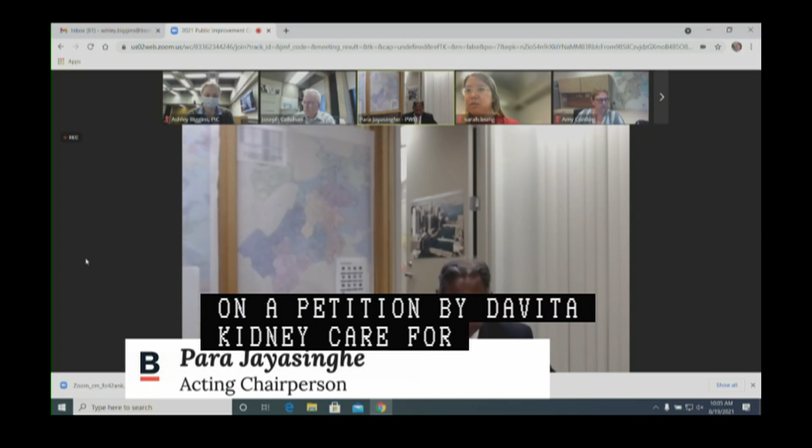First item of the hearing agenda, public hearing number 1, on a petition by DaVita Kidney Care for the making of specific repairs within Harrison Avenue, a public way, Boston proper, located on its southeasterly side at address number 660, generally northeast of East Canton Street, consisting of curb and sidewalk reconstruction, as well as new and relocated pedestrian ramps, specialty pavements, and bike racks. This was brought on as new business on August 5th of this year, 2021, as shown on a plan entitled City of Boston Public Works Department Engineering Division Specific Repair Plan, 660 Harrison Avenue, Boston proper, one sheet dated July 2020. Good morning. Good morning, thank you.

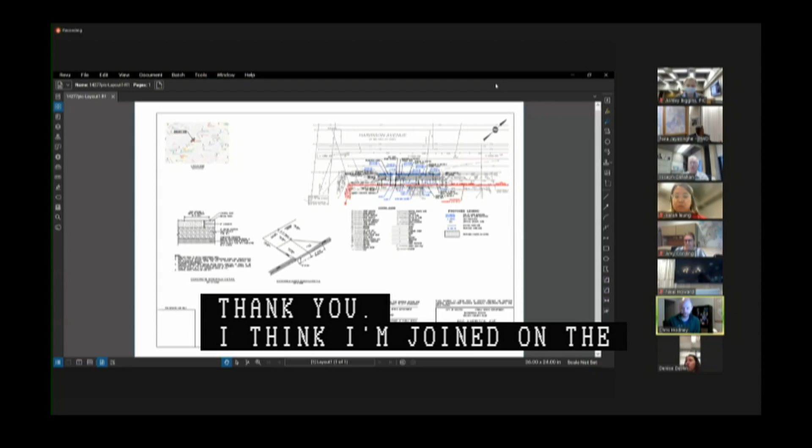My name is Chris Sade with Nitsch Engineering. I'm joined on the call by Paul Terrell, Tech and Architects, as well as Michael Meyer from DaVita. We were before PIC at the new business hearing a couple of weeks ago. The site location is on Harrison Avenue between East Canton and East Dedham Street. This was previously in front of PIC a couple of years ago in 2018 for other work that was done as part of the Smith project, and this is just a minor modification to that work.

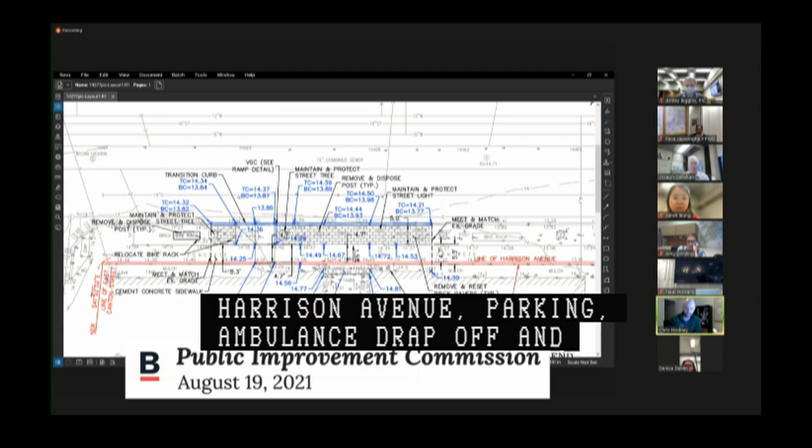The proposed plan includes the changing of 3 spaces along Harrison Avenue from their existing metered parking to ambulance drop-off, and then some modifications to the sidewalk to bring the new door at the building to level with the sidewalk so that there can be accessible access inside the building. So we've got the new ramp here, new sidewalk here, and then some grading. All the materials will be put back in kind, so that includes the cement concrete sidewalk and the permeable strip. And then there is an existing pedestrian easement that was approved back in 2018 on the sidewalk as well, which gets the width to the minimum 5 foot required.

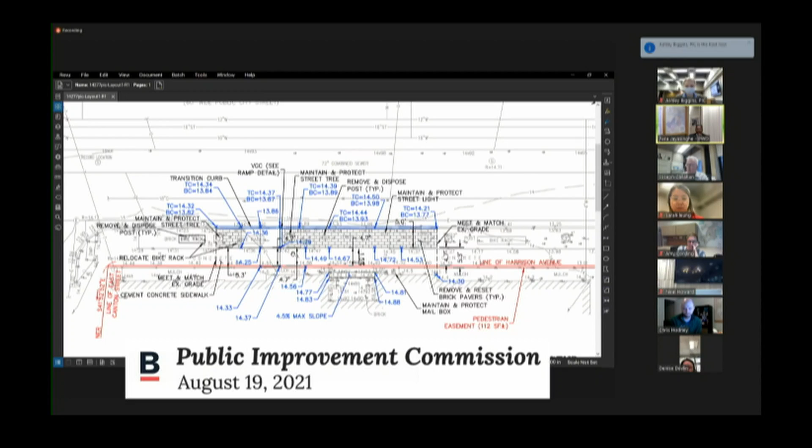And then the one question that had come up at the previous hearing was just coordination with BTD, and I forwarded to Todd this morning. I know Ms. Cording wasn't on the call a couple weeks ago, but just the correspondence between Brian Zamoka at our office and the BTD. Thank you, Chris. At this point, I'll open up for any questions by fellow commission members.

Hearing none. Any comments by PIC staff and or members of today's audience? No, none. Thank you, Todd. At this point, I'd like to hear a motion regarding public hearing number 1. I'll make a motion to approve a petition by DaVita Kidney Care for the making of specific repairs within Harrison Avenue as read into the record by the chair. Second. All in favor, please signify by saying aye. Aye. Anyone opposed or abstain?

Good morning. Good morning, can you hear me? Yes, we can, Richard. I'm having a little camera difficulty, so I think I've only got audio this morning. Hope that's okay. That's fine. Go on. Yeah, so let me just get my screen shared here.

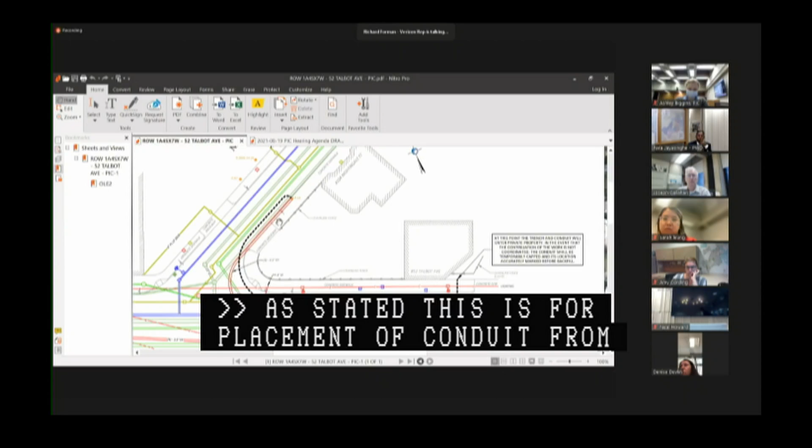Thank you, Richard. As stated, this is for placement of one 4-inch Schedule 40 PVC conduit from existing pole 14 on Nightingale Street to the property line at 52 Talbot Ave. It was requested by Boston Water and Sewer to have this conduit placed closer to the curb line on the corner of Nightingale and Talbot so that it would avoid crossing the sewer line twice. We have moved the conduit closer to the curb line, which has slightly changed its footage.

I've also communicated with Verizon regarding the city shadow duct. This is going to include a city shadow conduit following the Verizon path. It's going to rise and be capped at pole 14, follow the same trench to the property line, and be capped below grade at the property line. The city's 4-inch and a quarter shadow duct is going to follow the Verizon conduit.

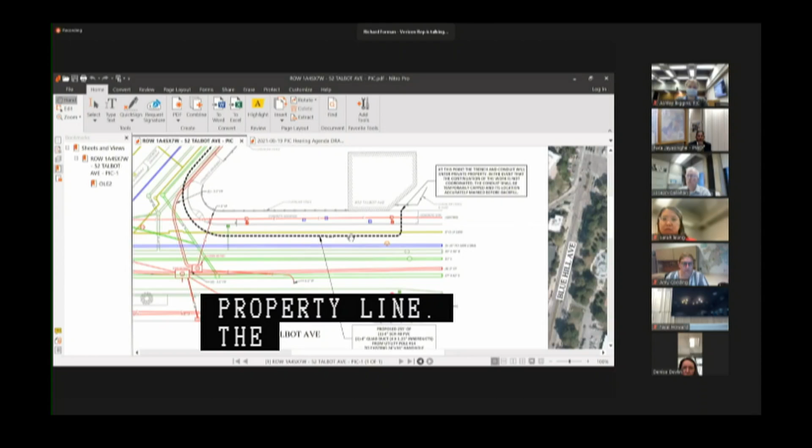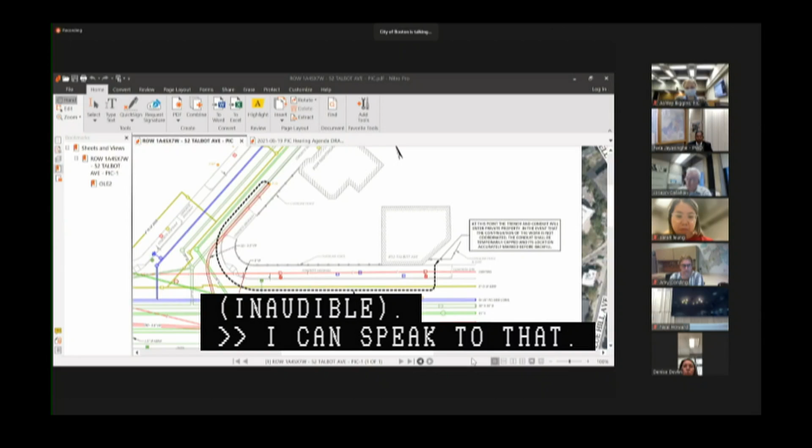Richard, was there anything else requested by either PIC staff and or commission members? My notes indicate there was a question about an extra handhold that may have been requested by my chief engineer of the Public Improvement Commission. Yeah, I can speak to that. I communicated with Verizon that we were requesting a city handhold in the sidewalk in the vicinity of 52 Talbot Ave so that we could access the city shadow conduit.

Verizon has come back and proposed that they bring the city shadow conduit up the pole and cap it above the sidewalk, at the other end, so that we could access the city shadow there. I would leave it to the commission to decide whether that's appropriate or not. I would be okay with that, personally.

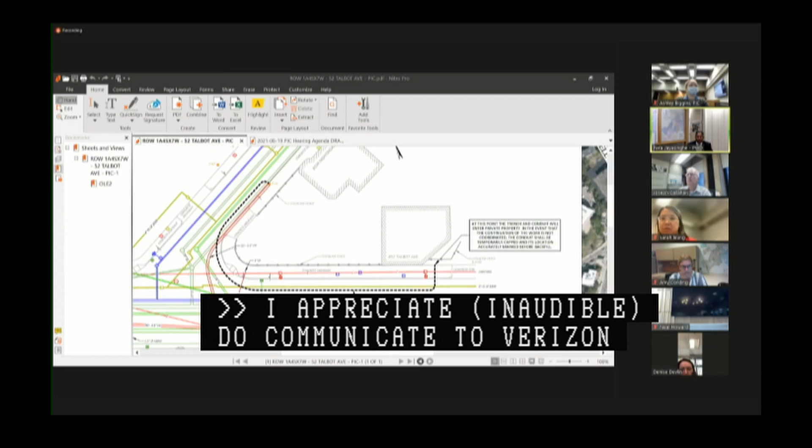Todd, I appreciate you trying to go the extra length to ensure the city has access. I'm not sure whether I'm comfortable with this means. We will continue this conversation independent of this petition, but do communicate to Verizon, and I'm communicating with all petitioners, including Verizon, that it is strongly desired that you all give very serious consideration to any requests or comments put forth or guidance given by Mr. Liming, who is the Chief Engineer for the Public Improvement Commission. So, any comments by fellow commission members?

Hearing none, any further comments by PIC staff and or members of today's audience? No, none.

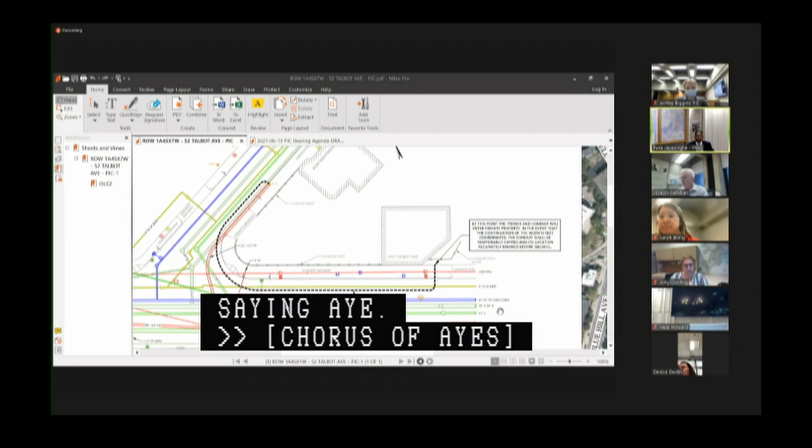Hearing no further comments, I'd like to hear a motion regarding public hearing number 2. I'll make a motion to approve a petition by Verizon New England for a grant of location in Talbot Ave and Nightingale Street as read into the record by the chair. Second. All in favor, please signify by saying aye. Aye. Anyone opposed or abstain? Motion passes. Thank you. That concludes the public hearing segment of today's agenda.

Now moving on to the new business portion of it. New business item number 1: Highgate Street, Cambridge Street, Harvard Avenue in Brighton, pedestrian easement, specific repairs, and earth retention license on a set of petitions by Allston Square Realty.

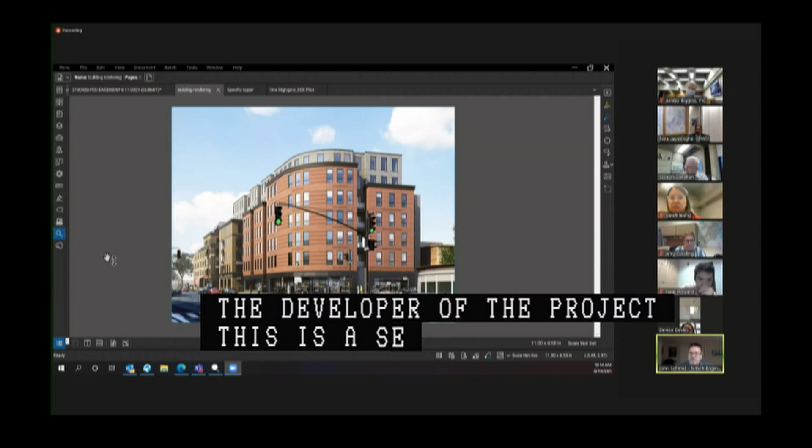Good morning, this is John Schmidt with Nitsch Engineering. Can you see my screen? Yes, John, go for it. With me is Jacob Simmons, who's online as well with City Realty Boston, the developer of this project. What we're proposing today is a 7-story mixed-use building with first-floor retail, consisting of 82 units of housing and a 59-space below-grade garage.

The first item is the temporary supportive excavation. We are proposing a soldier pile and lagging system around the perimeter of the site, which will be cut 6 feet below the sidewalk once it's constructed. Along Harvard Avenue, we project about 2.5 feet into the public way. On Cambridge Street, we project 2.5 feet into the public way. And on Highgate Street, we project into the public way about a foot at the end of the building here. I apologize, this project is located in Brighton at the intersection of Cambridge Street, Harvard Ave, and Highgate Street.

If you like, I can accept questions. Any questions regarding this proposal?

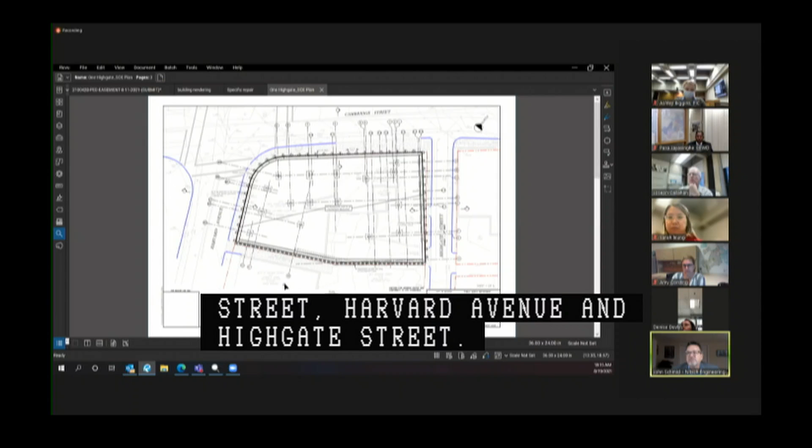Sorry, John. Normally Brian Ronan from Inspection Services Department gives us guidance on matters of this nature. Today, due to scheduling issues, Mr. Ronan is unable to be here.

I don't quite recall what his schedule is like for the public hearing date, but what would be truly helpful is if for some reason Brian is unable to be at the commission hearing two weeks from now, to have a statement from Mr. Ronan to both you and PIC staff attesting to the fact that he is absolutely okay with the earth retention system.

Yeah, we did do the full notification process of 22 city agencies and utilities, and within the engineer's report, we have an email from Brian saying he has no objections. But what I can do is forward him this drawing and over the next two weeks just confirm he no longer has any objections.

Thank you, John. Appreciate that additional due diligence. Thank you.

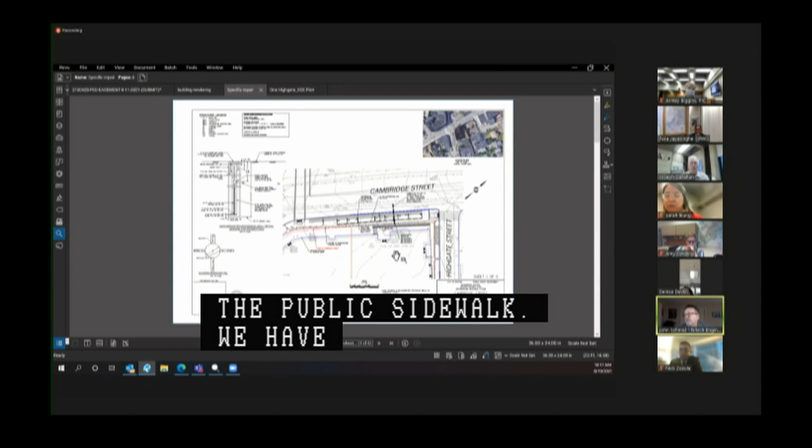Moving on to specific repairs, along Cambridge Street, we are proposing a series of recharge wells in the public sidewalk. We have 8 wells and a tank within the building that will capture the 1 1/4 inch stormwater runoff. We have a system that will pump into the 8 wells within the sidewalk, and then it will overflow into the city system.

The drawings have been presented to Boston Water and Sewer, and we've received 2 rounds of comments, and we are resubmitting the site plan for approval in the coming week. So they are familiar with this application.

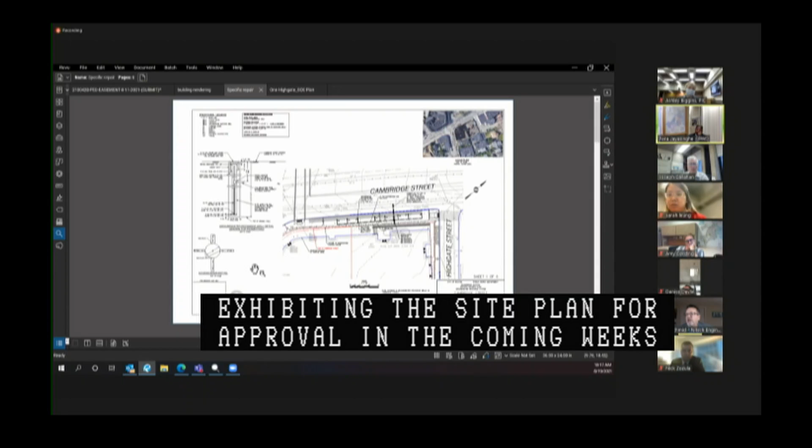John, your thoughts on the maintenance agreement? So the LMI is in the process of being prepared and reviewed with Chung. I will ensure that at the public hearing, I will give you an account of the status of that. But my client is committed to providing the maintenance that's required for the system.

John, as I and other commission members have echoed in the past, our preference, to the point of insistence, is that the maintenance agreements be executed at the time of the public hearing, not just additional conversation. So if you could encourage all parties to have an executed agreement, because it becomes increasingly difficult for us to record these plans in the absence of a signed executed document, where the execution date of the signed LMI doesn't match up with our recording dates. Understood. I will push everyone to ensure that this happens.

Thank you. Thank you. Continuing. We have a series of specific repair plans around the perimeter of the site.

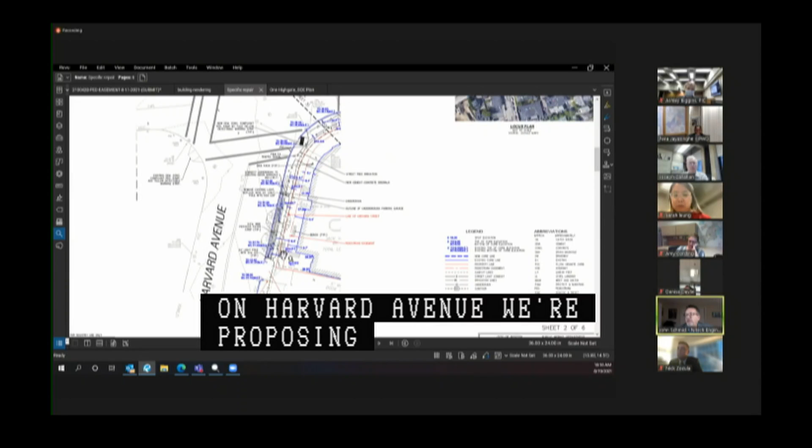On Harvard Ave, we are proposing a 3.5-foot pervious paver along the curb line and providing an 8-foot wide accessible concrete sidewalk. In doing so, we are proposing a pedestrian easement as well. We have new street lighting that has been reviewed and approved by the Boston Street Lighting Department.

We are proposing 2 new street trees along this as well, and we also have some bike racks within the paver zone. One thing I'd like to note, and I realized during the previous hearing, is that we do not propose any shadow conduit, so we will ensure that shadow conduit is indicated on the final public hearing drawing.

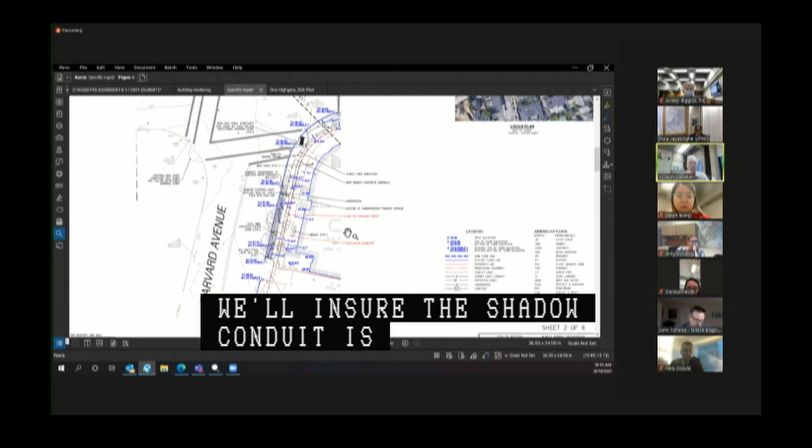Moving along to Cambridge Street. Along Cambridge Street, we have 3.5 feet of pervious pavement, 8-foot minimum concrete sidewalk, 7 new street trees, as well as some seating areas in the pervious paver zone, 7 seating elements, and a series of bike racks within the pervious paver zone.

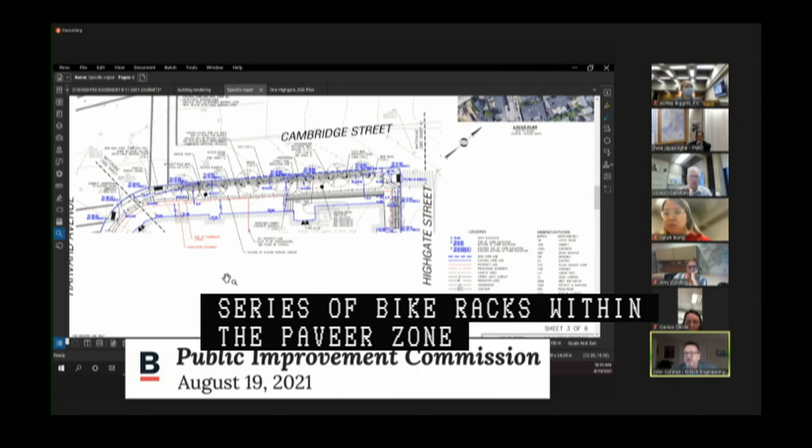What else can I say here? I was informed this week that the city has a capital improvement project within Cambridge Street. I've been told that it will not impact the curb line, but we may be asked to provide a bus stop along Cambridge Street.

So I have reached out to BTD, and I'm trying to schedule a meeting with them early next week to understand exactly what is proposed here, so we can address it in the next couple of weeks prior to the public hearing.

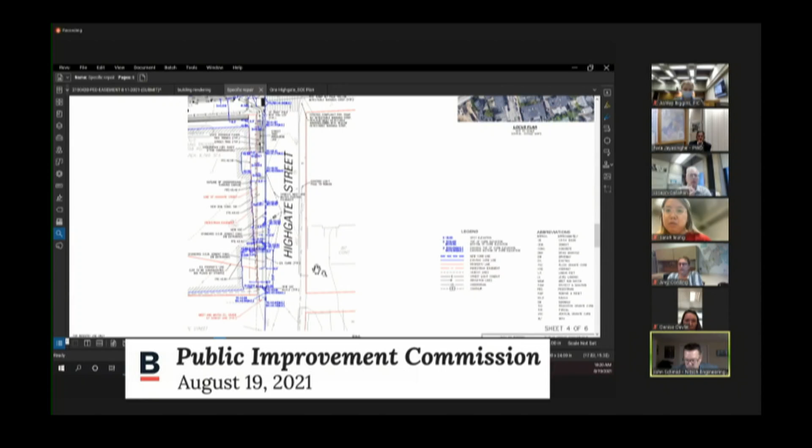Moving along to Highgate Street. Near the intersection, we provide a 5-foot wide pervious paver with 2 street trees, and then throughout the entire sidewalk, we provide a 5-foot wide concrete sidewalk. We have a loading zone here.

We have a garage entrance here, which is 23.6 feet wide, and then we have a loading zone, a loading dock, which is 12 feet wide along this. But we do provide a little refuge area between the 2 openings and the 2 access points to the building.

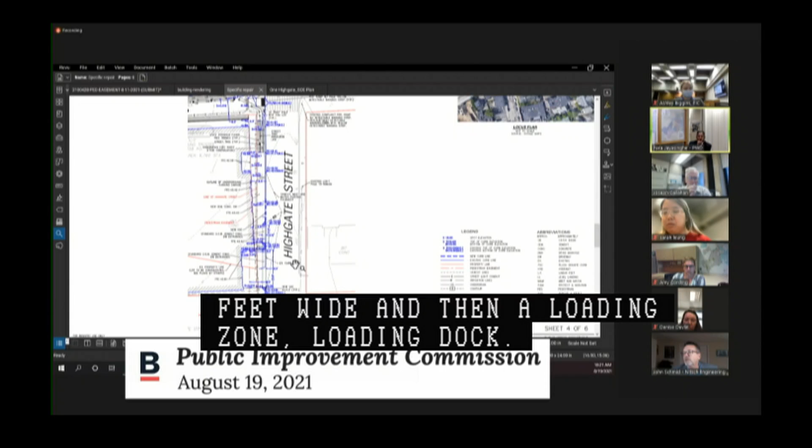John, I'm sure you meant Highgate Street, not Highland Street. I apologize, Highgate Street. Thank you.

Any questions regarding the specific repairs? And then our final application is the pedestrian easement.

All right, my computer froze. The pedestrian easement, here we go.

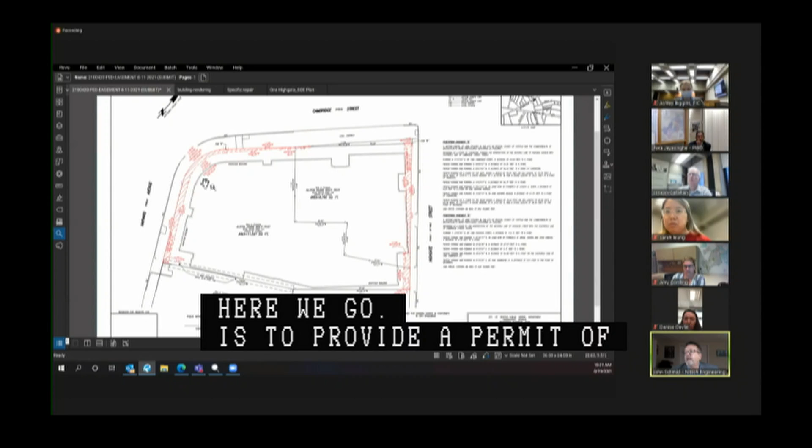The pedestrian easement plan is provided around the perimeter of the site to ensure that along Harvard Ave and Cambridge Street, an 8-foot wide concrete pedestrian access is provided. Along Highgate Street, we have a 5-foot wide pedestrian access on a concrete sidewalk.

So that is the gist of our application. Any questions?

John, do you have a sense of when the project proponent might be anticipating to start construction?

Yes, my client is anxious to start construction early this fall. This project was cooking along nicely until COVID hit last spring. Then it was delayed for 6 to 8 months, and then we picked it up late spring. We're wrapping up construction documents as we speak. We hope to have BWSC permitting approval within the next few weeks. So I believe they hope to begin construction sometime in September or October.

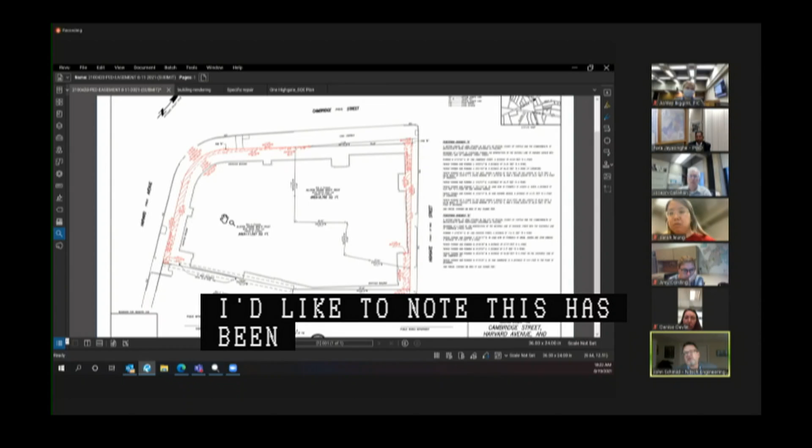I'd also like to note that the TAPA has been reviewed, and the final version is with Bill Conroy, and the CMP has also been reviewed, and the final revised version is with BTD. So those two items are also in the process of being completed.

My question regarding the construction of this project is in relation to the city's capital improvement project. If you could let your client know that the city will be having a noteworthy cycle track bicycle lane project and safety improvement project going through this corridor, so there will be needed some coordination with the city's roadway project and this project.

Thank you. John, I think Zach Wasserman will be the best in public works to give you guidance on the rough timelines, as much as you are seeking considerations or guidance from the transportation department regarding the location of the bus stop. Okay, I'll reach out to Zach.

Thank you. At this point, I'll open up for any questions by fellow commission members.

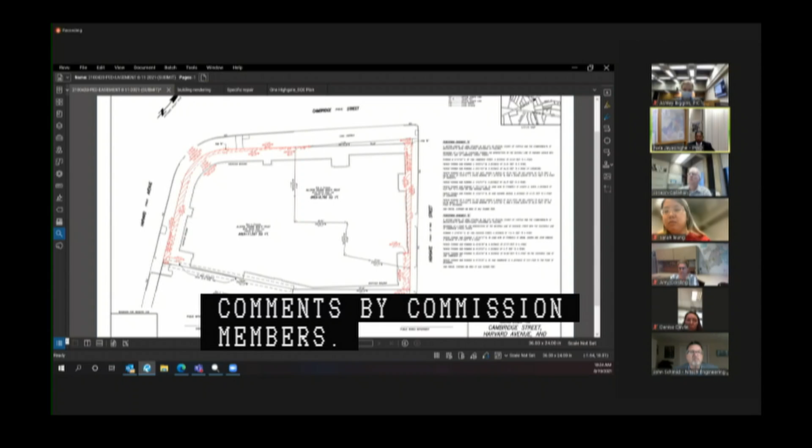Sarah, I'm going to assume that you are okay with the width of the pedestrian easements that are being proposed in conjunction with the streetscape improvements they are doing, where there's adequate width on both Harvard Ave, Cambridge, and Highgate to accommodate your needs, meaning the needs of the commission.

Yes, the team has adequately addressed our comments from earlier this year, as well as addressing the comments regarding the reciprocal ramps at Highgate and I believe Cambridge and Harvard.

I'm not sure if we received those plans by email, but John, if it's possible to just send updated plans to us, that would be great. I will do that. But otherwise, these reflect our comments that we made.

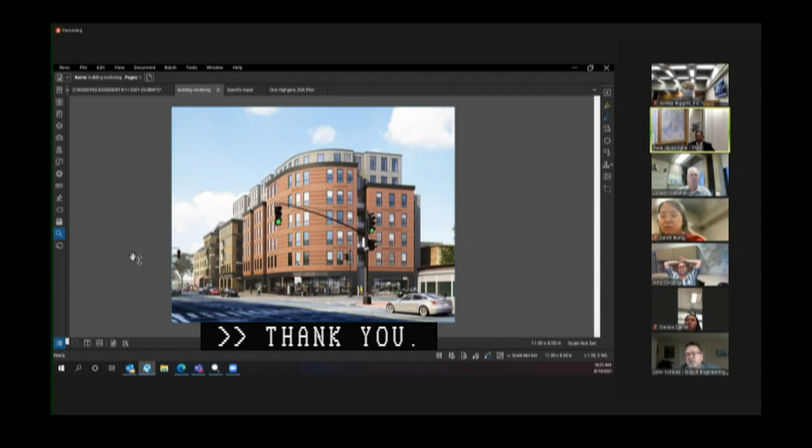Thank you, Sarah. Amy, I suppose John Schmidt will have to coordinate with Matt Moran for the bus stop over there. I'm not sure whether the inclusion of the bus stop might require adjustment of his specific repair plans. Yeah, he's already reached out to Matt. We should be able to pull this off by the public hearing.

Thanks, Amy. Any other comments by fellow commission members? Hearing none. Mr. Liming, any comments by PIC staff and or members of today's audience?

Just would like to point out, and John can confirm, that what was shown is an old version of the plans. There's a grease trap proposed for Cambridge Street that's going to be removed, correct John? Yes, that's right Todd. I was actually going to address that in my presentation, but I was hoping no one picked up on that. But yes, that will be removed in the final submission. Thank you. Honest mistake. Oh, good eyes.

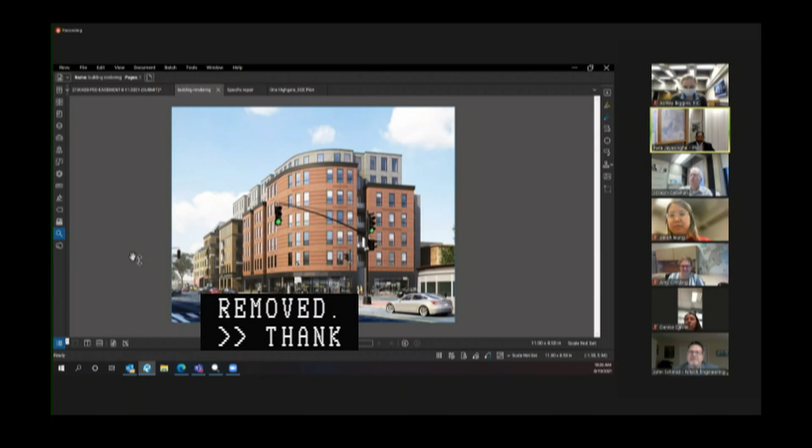And you too. Second item on today's agenda, 282 through 300 Bremen Street, Brooks Street, East Boston, pedestrian easement, specific repairs on a set of petitions by 282 Bremen Owner LLC. Good morning.

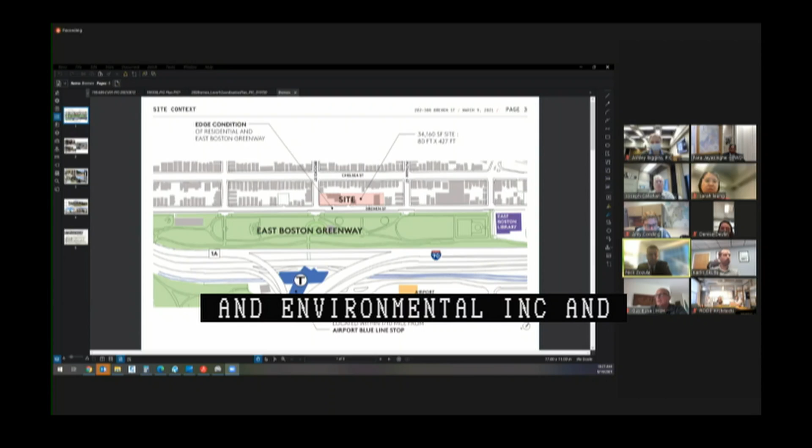Good morning, Mr. Chair, members of the Commission, Attorney Nick Zazula, McDermott, Quilty, and Miller. Introducing the team, we have the petitioner with me this morning, 282 Bremen Owner LLC, Neil Howard and Brian Lee. Civil engineer is Carlos Sculti, who's sharing his screen now, from Civil and Environmental Consultants, Inc. We have folks from Rhodey Architects on as well, who's the architect on the project, and I believe I saw Guy Busa from Howard Stein Hudson as well, who is on the project.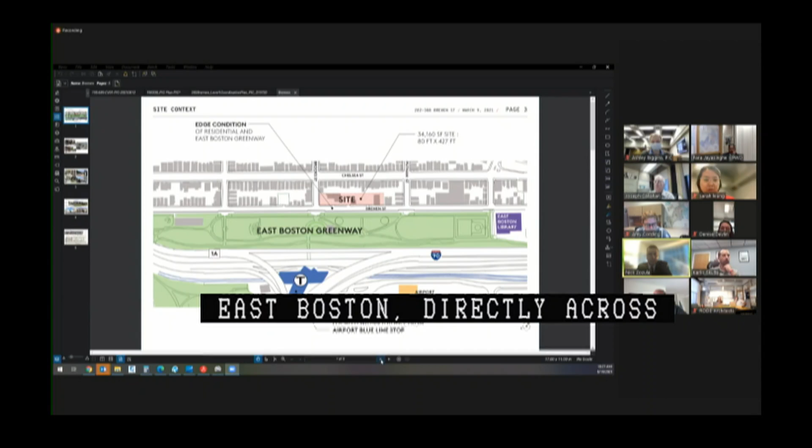Mr. Chair, just because this is the first time you've seen this project, I just want to give a brief overview and background. The site's 282 to 308 Bremen Street, as you can see here on the screen. It is in East Boston in the Maverick Central neighborhood. It is directly across the street from the Bremen Street Community Park and runs to the corner of Bremen Street and Brooks Street. The site itself is a fairly large site.

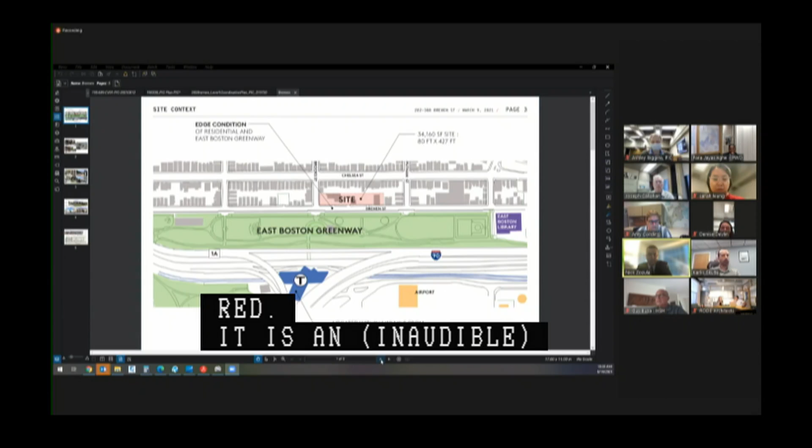It's about 34,160 square feet. It's narrow and elongated in shape, as you can see from the site pictures here in red. It is an edge condition, and what's on the site now is basically automobile repair facilities, garages, and a small nondescript 4-unit residential structure, but really just lots of paved parking, no landscaping, no open space, etc.

So in planning the project, which you'll see before you today, a lot of care was taken to respect this elongated shape, its visibility on the park, and its visibility on the corner, designing a building that responds to that. What is being proposed is a 110,000 gross square foot building.

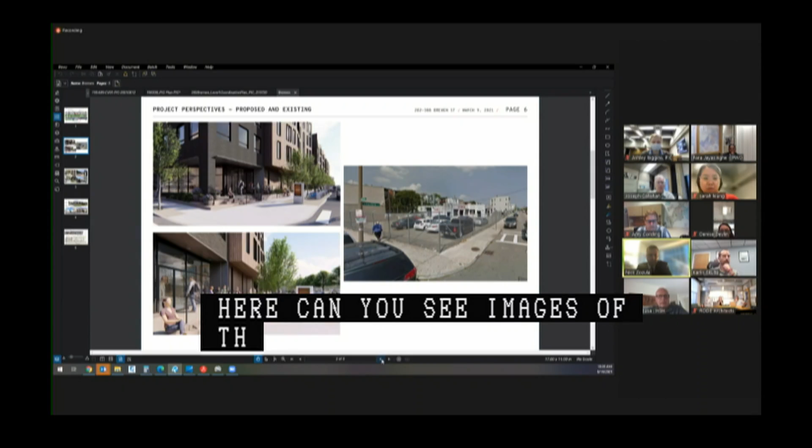Here you can see some images of the streetscape now. Again, you can see the garage on the right, and some street images on the left of what's being proposed. What's being proposed is a new 5-story building with 4-story end caps that step down towards Brooks Street as well as towards the other side of the project.

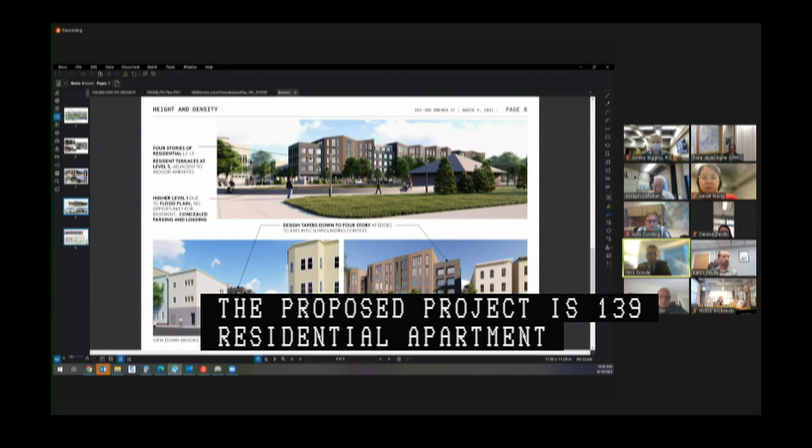The proposed project is 139 residential apartment and/or artist live-work units, which would be on the ground floor to activate the street. About 2,100 square feet of artist workspace on the ground floor, about 3,200 square feet of retail space, lobby, and storage on the ground floor, and garage parking for up to 61 vehicles.

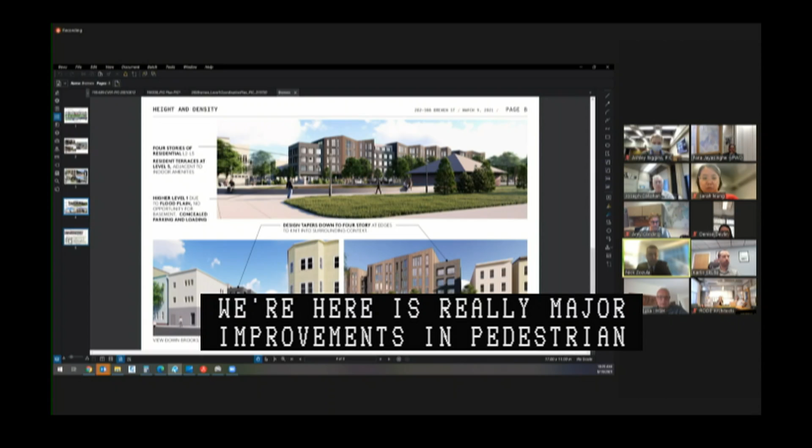And obviously why we're here today is really major improvements in pedestrian access, open space, public realm, and things of that nature. The project has been approved by the BPDA. It's a large project review, so there were a lot of eyes on this from city agency perspectives, the public, et cetera. That was approved back in February 2020.

The zoning board approved this project back in March of 2021, and many of the upgrades, specific repairs, and the ped easement that you'll see in just a moment came about as a result of an extensive Article 80 outreach and administrative city agency review process.

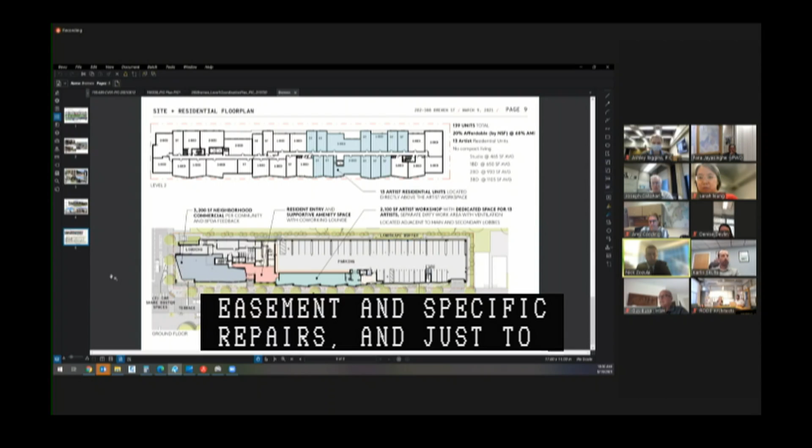We're before you today for a ped easement and specific repairs. And just a note before I toss it over to Carlos to go through what you really want to see today: I heard John Schmidt talk about the TAPA status and the CMP, and both of those for this project are at BTD currently.

The CMP is under review as of today, and the TAPA has actually been reviewed and approved, and we're just waiting on the paperwork to execute it with Bob D'Amico over at BTD. So we're moving along on that front as well.

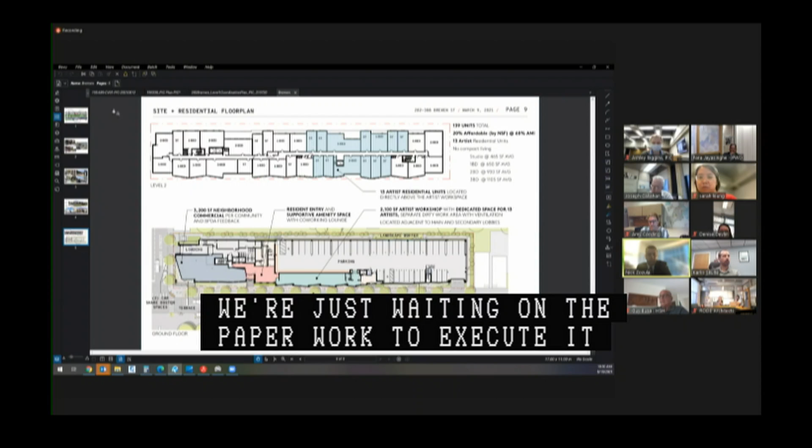Can everybody hear me? Yes, Carlos, you're fine. Great, thank you. For the record, Carlos Scolti with Civil and Environmental Consultants, the civil engineer on this project. As Nick mentioned, we're in front of you today for a specific repair and pedestrian easement application.

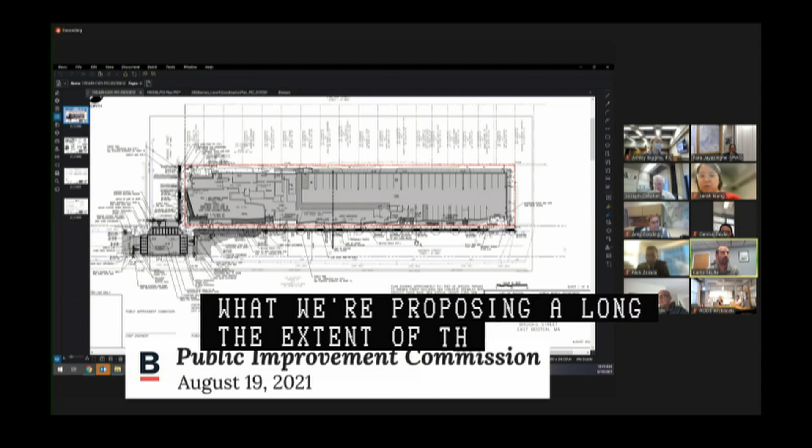A lot of the work that we're doing is really cleaning up the frontage and adding a lot of improvements to the streetscape on both Bremen and Brook Street. So what we are proposing along the full extent of the frontage on Bremen Street is a pervious paver strip, a 3-foot wide strip along the extent of the majority of the building, along with a 5-foot wide concrete sidewalk that will provide the accessibility.

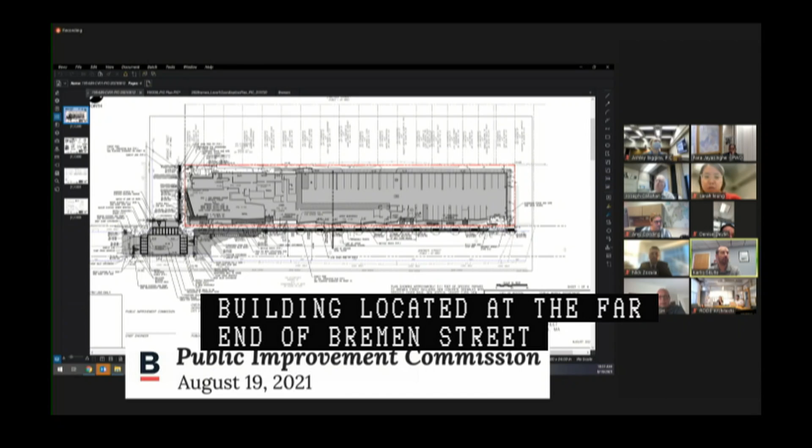So in order to construct that 5-foot wide sidewalk, we do have a pedestrian easement that extends onto the property, allowing for that full 5-foot width for accessibility. There is a single driveway entrance into the ground level garage for the building, located at the far end of Bremen Street, which is 20 feet wide. That is the only driveway access on Bremen Street, which really reduces the amount of curb cuts that are there today, cleaning up that frontage.

And along Brook Street, we have a single loading access into an enclosed loading space within the building. That one's 12 feet wide off of Brook Street.

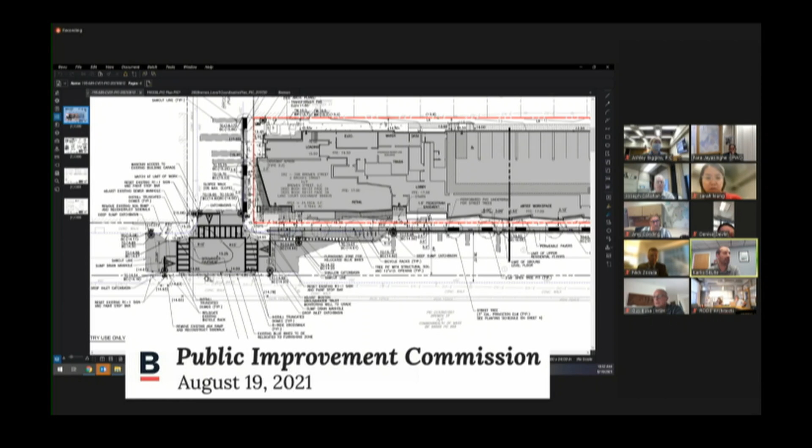Within that pervious paver strip, as we get closer to the intersection of Bremen and Brook, a major change being proposed as part of this project is expanding the pedestrian realm and streetscape frontage with a shifted curb alignment that will allow for relocation of the existing Blue Bikes, currently located on the southerly side of Bremen Street. Those Blue Bikes will be relocated along the furnishing zone here in front of the main retail entrance to the building.

It'll be an expanded pervious paver zone from the back of curb to the 5-foot wide accessible path here. Within that zone, there will also be additional bike storage provided, as well as additional bike racks added along the extent of Bremen Street, cascading down the street. There'll be additional bike racks proposed within that pervious paver zone along Brook Street as well.

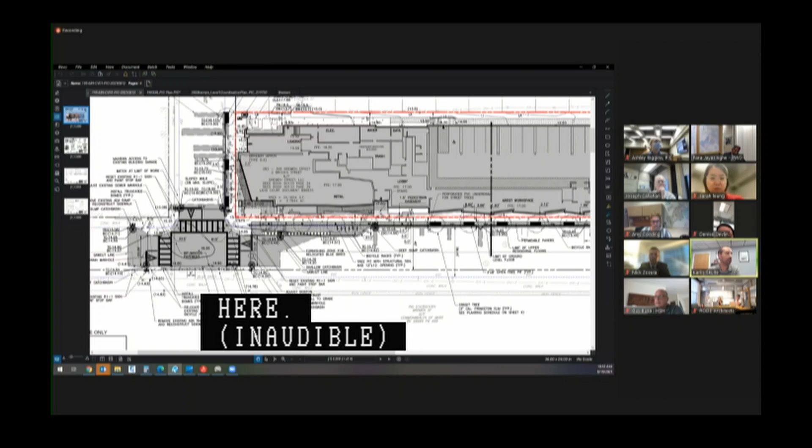There's also going to be a significant improvement in terms of access and pedestrian connectivity to the park on the south side of the road. We are proposing a raised tabletop intersection at this location, and we've been working with BPDA, parks, and disability staff to make sure the alignment and geometry of this intersection works for everybody. We've received preliminary feedback and have a meeting scheduled next Tuesday to review comments, revise the plan, and resubmit with any minor tweaks warranted. This will provide an improved condition at this intersection, which will remain stop controlled in all directions as it currently is today.

We are also in front of Boston Water Sewer Commission. We've received two rounds of comments on our site plan submission, and we'll be resubmitting pending final revisions to the PIC plans. In order to facilitate construction of the raised intersection, we had to add a number of catch basins to pick up stormwater and prevent any localized ponding.

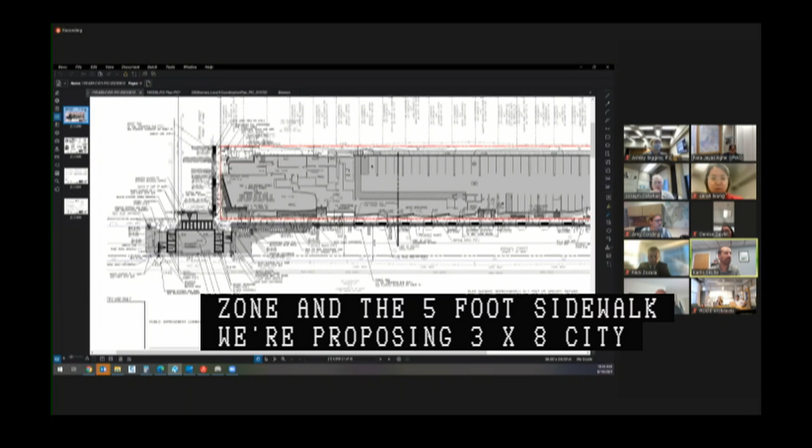With the improvements along the frontage, we are proposing to add 19 new street trees; currently there are none. Within the standard width section, where we have a 3-foot pervious paver zone and a 5-foot concrete sidewalk, we're proposing 3x8 city standard tree pits with mulch. In the area with more anticipated pedestrian activity, we're proposing a 12-inch by 12-inch opening at the base of the tree with a pervious paver placed on top, as well as structural soil and drip irrigation to maintain and provide better tree growth in the future.

That's the majority of the improvements we're proposing as part of this project. We're happy to take any questions or answer anything else the commission would like clarification or additional information on.

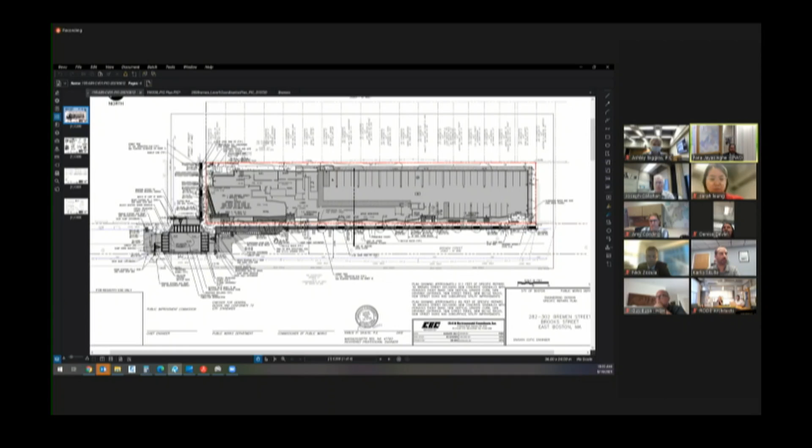Thank you, Carlos. I have a couple of points of clarification, and some questions related to your presentation, and then a question about the opening slides which Nick presented. Let me start with yours, Carlos.

Sure. So the retail space that is there, when you are programming the building, very close to the intersection, I see the word retail. Can you point to the retail space? Okay, right about there. So Nick, the concern which the city may have, or should have, is the type of retail that's going to be there that might end up with cars stopping illegally, surprise, right by the entrance to this intersection. So Nick, there should be some consideration given to the consequences of the type of retail there. Do you have any sense of what type of retail is being proposed that might cause someone to park in front of that area, now that the sidewalk has been pulled out? So I have a bit of a concern, the city may have a concern. Can you respond to that, Nick, first of all?

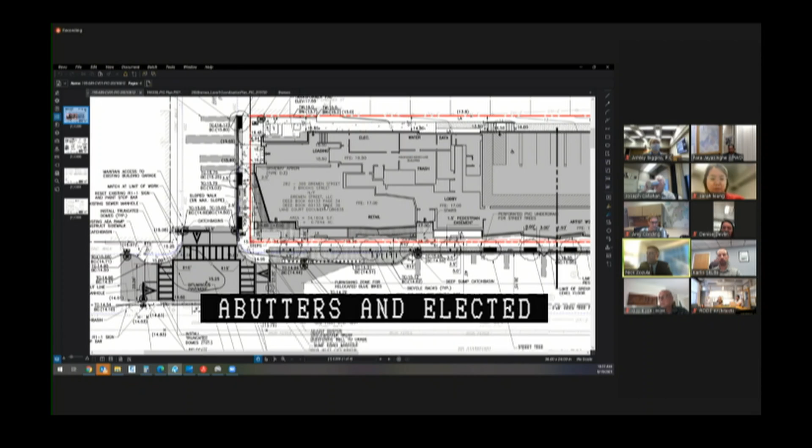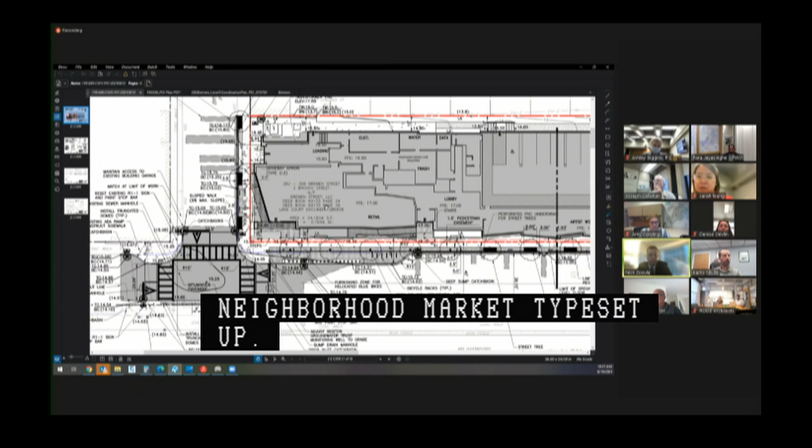Yes, I can. So the idea here is there's no tenant right now, but in discussions with neighborhood groups, abutters, and elected officials, they thought it'd be a good spot for a small cafe or small grocery store — a much needed public amenity. This is a major crossing area coming from the train, from the Blue Line through the park, and folks were loud and clear that they wanted some sort of small grocery store or retail, potentially a cafe where people could grab something walking to and from the train in the morning — a neighborhood type retail. It's not meant to be a huge space, I think a couple thousand square feet, more like a neighborhood market setup. It's a good point, and we can certainly look at that. We do have bump-outs and other things taken into consideration on this corner to help stop that from happening, but in general the programming is not meant to encourage folks to double park at this location.

It's more meant to be a walkable type amenity, not a parking and drive-to type amenity for the neighborhood. Thank you, Nick. My second question.

The city has a system of a deposit when people are redoing our sidewalks, meaning we take a deposit from you in case you don't put the sidewalk back as it should. I'm sure, Nick, you're familiar with that process, right? We've been doing it for quite a few years.

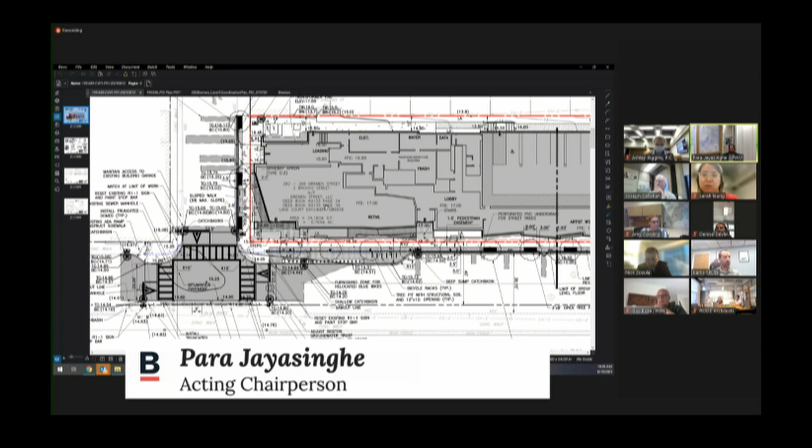Yes. Okay, now, here you are proposing some roadway improvements also. Basically, you are jacking up the street, raising the street for this intersection. So Nick, can you walk me through how you are going to prove to the city that the construction work done by your client will conform with city standards and give us a roadway that is properly graded, properly raised, properly drained? Can you walk me through how we are planning on doing that?

Yeah, Carlos, that might be a better one for you. I don't know if it's more about the construction of it.

Absolutely, sure. So as it relates to the materials and the drainage that was mentioned earlier, we are in front of the Boston Water Sewer Commission for the site plan review. So they are reviewing the drainage to ensure that everything is designed and constructed for all the applicable standards. And that includes the stormwater report and all the analysis. So from a drainage perspective, that will be done in full compliance with the Boston Water Sewer specifications and requirements.

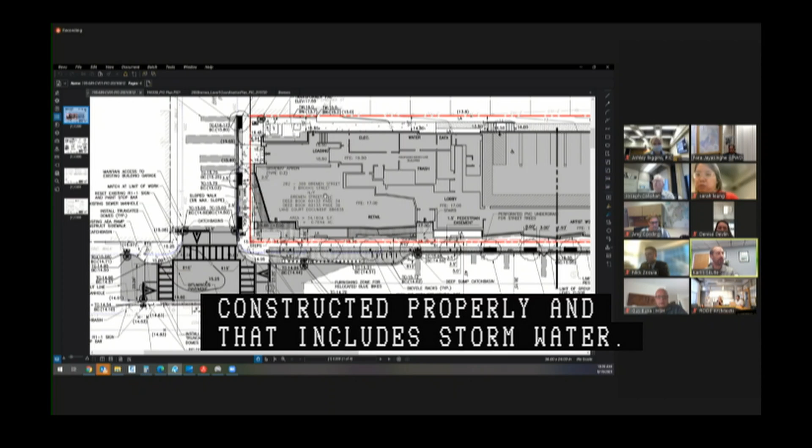As it relates to the materials, the intersection will be repaved with city standard thickness for the pavement, and the tabletop has been designed in accordance with the public works and transportation details for the approaching ramps, as well as for the materials for the asphalt for the full tabletop intersection. So we are designing it, including details that will comply with the city standards.

As it relates to the construction and the phasing relating to traffic flow and management during construction, my understanding is that a traffic management plan will be prepared for this work, showing the phasing of it, as well as how the work will be performed with minimal disruptions to traffic. Thank you, Carlos, for that clarification.

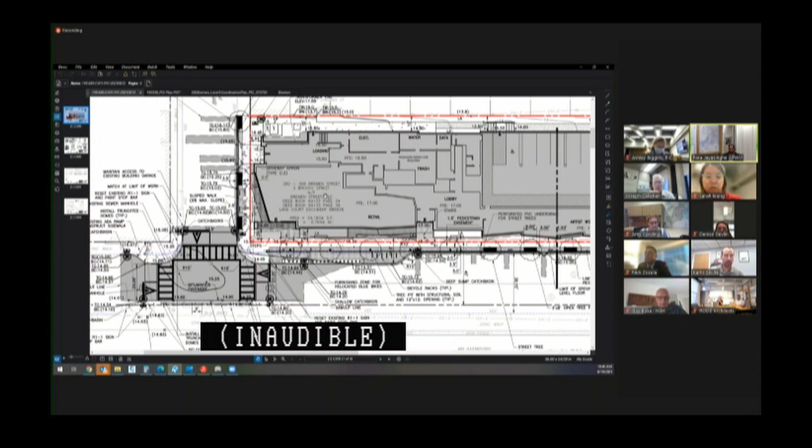But I have a very specific point, so I will get as specific as possible. The contractor for construction is going to be hired by the petitioner, okay? And Carlos, there's going to be a point in time where after the contractor does the construction per your design, will you be able to certify that the work has been done to your design standards, which were done in conjunction with the city standards?

Will you? Sure, yeah, to that point, we would have a construction oversight role with the work. It's traditional with these kind of projects that we would have a presence during construction. We would oversee some of the work to ensure that the contractor is building it per the plan.

Right, so you will certify to the city that the work done has been done per your design that was in consort with city standards. Is that affirmative? Sure, if that's a requirement, we're happy to provide that. It is always a requirement when proper.

Because again, the distinction I want to make is the sidewalk deposit - all the work on the sidewalk, the city takes a deposit, meaning that if for some reason the work was not done correctly, we have recourse. Here, we don't have that. So I'm requesting that certification be done by you as the designer of record.

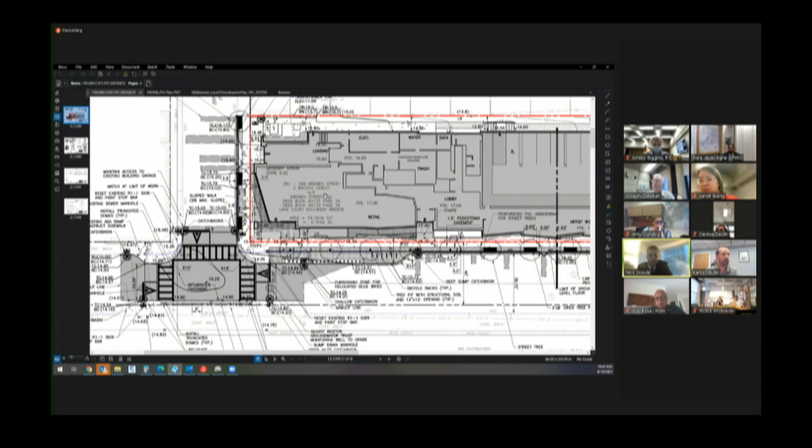Yeah, and Mr. Chair, through the Article 80 process, because this is large project review, and these are tied into that review with the BPDA and the city, we need to get a certificate of completion at the end of construction in order to get occupancy. And because this is part of those improvements, the city and the BPDA would need to certify that all the construction for the building itself is done correctly and as to the plans, right? So we don't build something we didn't agree to build. And my understanding is that would also entail these other improvements as part of the project.

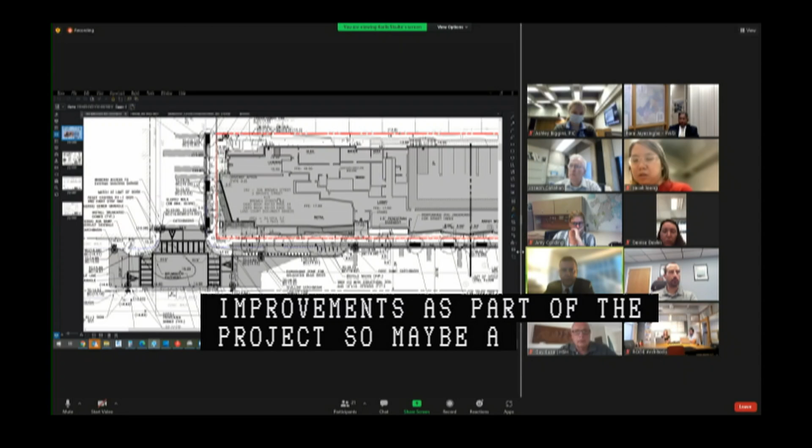So maybe a belt and suspenders approach where we'd have to also certify that with them as well. But whatever we need to certify as part of the process, we'll obviously do. Thank you, Dick, truly appreciate that. So let me look at my notes.

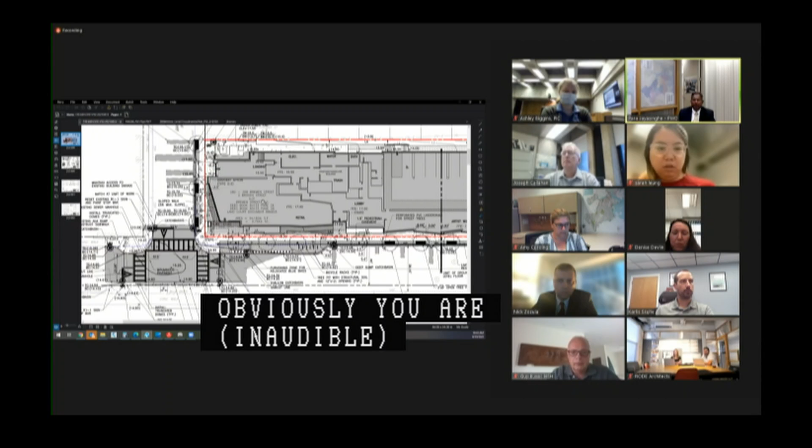And obviously, you are proposing a lot of trees and things of that nature. So again, as I mentioned in the previous hearing, we would very much like if the maintenance agreement can be executed, not 'hey, we are working on it' by the public hearing date. This way, when we are going through the process of recording these plans, there's no conflict between the recording date and the executed maintenance agreement.

So now, Nick, if you could be ever so kind and go back. Oh, actually, sorry, my bad. Are there any questions by fellow commission members regarding the plans that you are seeing here by Carlos?

The Disabilities Commission looks forward next week to discussing some of the unaddressed comments and just closing the loop on those next week. Thank you, Sarah. Any further comments by fellow commission members before I ask Nick to go back to his presentation?

Hearing none, Nick, could you go to maybe the first or the second slide which you put? There was something I noticed. You mean these slides, kind of the overview, not this one, maybe the next one. The next one, sure, that one. Okay, so on the left-hand side, the two pictures, I don't know how to describe it. At the foot of the stairs, next to the tree, there seems to be like a notice board. What is that?

Correct, I believe that is a transit board, Carlos. Is that like letting people know when the buses are coming and things like that? Or I don't know what that is actually. Well, slow down, Nick, because that is my point. I didn't want to interrupt your thinking, and I was waiting for Carlos to mention that in his presentation regarding the specific repairs, and he didn't mention it. So now I'm trying to figure out what the heck is this.

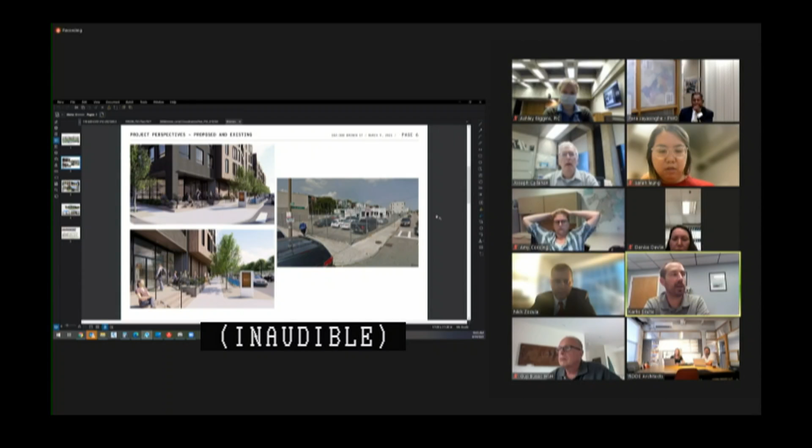That's a good question, and this might be something that's better handled by RODE, the architect on the project. He's heavily involved in the initial permitting, but there will be a transit hub, my understanding is within the building. With that, I'll turn it over to the folks from RODE to provide a little more insight on the specifics of the equipment here.

Thanks, Carlos. This is Ruthie Coolman with RODE Architects. Just to follow up on what Carlos was saying, yes, in discussions with the city, the Bluebikes location here and the bump out at the curb is creating a transit micro hub, which as part of that has some integrated signage. We're working with the city on the specs of that piece, but it fits in with the blue bikes and this connection to the blue line T-stop.

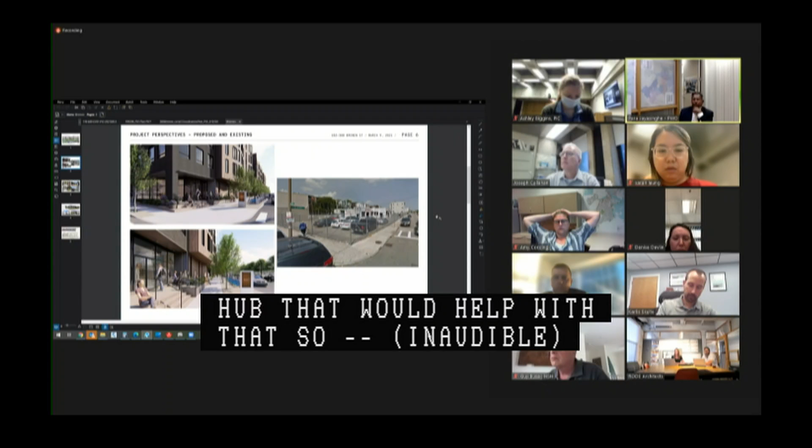Thank you for the point of clarification, which poses another series of thoughts and questions. Who is going to maintain this asset? Basically, if a car goes and smacks it, who is going to be maintaining that? Is it the MBTA? Is it you? It's not me. It would be, I believe, because this is a rental building, this would be managed by the building. Ouch. Okay, so we just need to delete the ouch part.

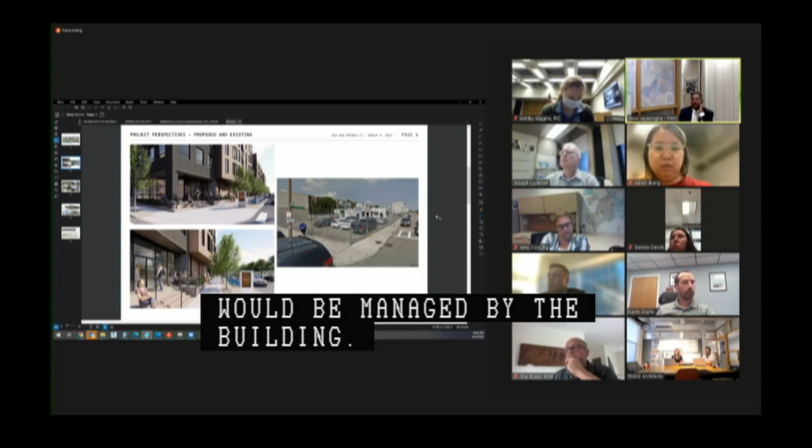Mr. Lining, hopefully all of these elements are very clearly specified on your maintenance agreement, which leads to my next question. Todd, are the full sidewalks, including the concrete segment, part of the maintenance agreement or just the specialty materials? Because the concrete sections of sidewalk are adjacent to specialty materials, the project will need to maintain those standard sidewalks as well. I will note that this sign and any utility connections to it are not shown on the current set of PIC plans, and those will absolutely need to be added in the next 2 weeks. Thank you, Todd. Yes, I did see the power source or all those connections.

Carlos, since your client is responsible for the maintenance of the sidewalks, including the driveway openings that are going to take a fair amount of cars in and out of the underground parking garage, you may want to look at the sidewalk design details to ensure that excessive vehicle traffic over that segment of the sidewalk is not going to tear it up, which is going to cause a maintenance challenge for you, but I'm more concerned about the tripping hazards for the pedestrians. Understood. The sidewalk along the majority of the frontage of Bremen will be a city standard with the pervious pavers, traditional tree grates, and the 5-foot wide concrete sidewalk. So we will include those details and make sure it's constructed appropriately.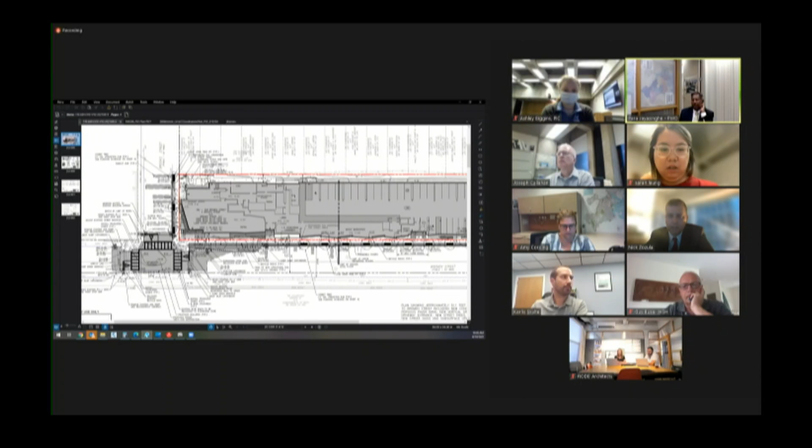Yeah, I mean, sometimes we put a little wire mesh on aprons that are like driveway aprons. So I leave it up to you because you're the one who's going to maintain that thing. That's all the comments I had. Any further comments by fellow commission members?

If I could just clarify, Mr. Chair, you mentioned the parking being underground. The parking's at surface, just for the record. My bad, sorry. No, it's okay. Just wanted to make sure that didn't bring up other questions because it's at surface. That's all.

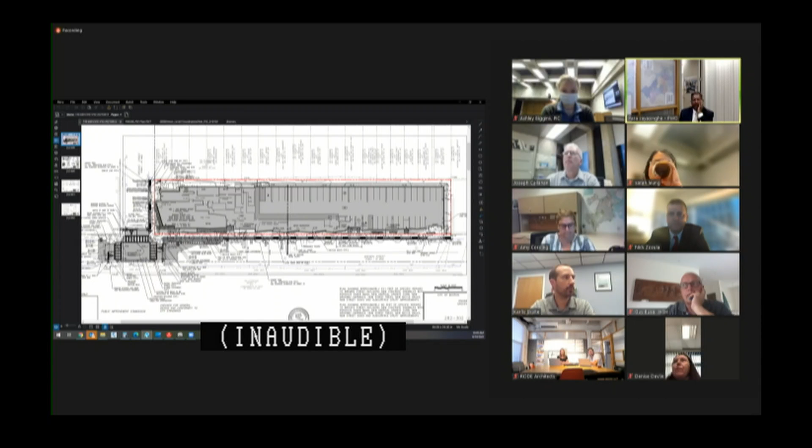Oversight, but I hope you understand. I'm going to assume loading and unloading of trash trucks happens on that side. So the sidewalk there will have more wear and tear than just pedestrian traffic. You may want to beef up the sidewalk deck with the appropriate material to ensure the longevity of your investment.

Okay, any further comments? Hearing none, we will mark you up for 2 weeks, which would allow us to see you on September 2nd. Is that okay with you folks?

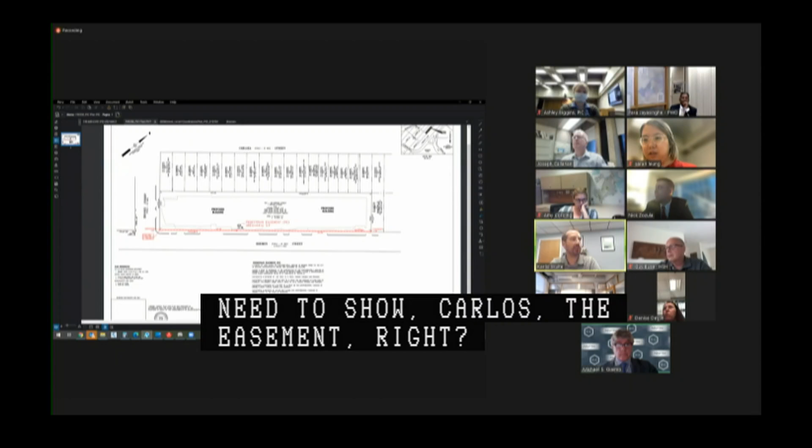Yes, I believe we also need to show Carlos the pedestrian easement, right? Sure, we touched on it briefly. I didn't want to skip over that. The second application will be the pedestrian easement. In order to construct the full 5-foot wide accessible path, we are providing a pedestrian easement along the full frontage of Bremen Street. We also reviewed, as a point of clarification, that any building overhangs entirely within the property but partially over the pedestrian easement will provide more than 12 feet of clear space below, so those will be compliant with the requirements as well.

Slow down, you went a little too fast for me. So basically you have an overhang above the pedestrian easement. I need the guidance of our inspection services department folks on whether it negates the formation of icicles that may fall and hit my skull. The city has a whole protocol for how those structures should be, whether they're internally drained or not, but there's a concern about icicles or matters of that nature. Can someone speak to that?

With the inspection services department, has it recognized the fact that you have structures that are going to be not over the current city right of way, but over the pedestrian easement? Please, someone. I will work with the project to ensure that these building elements are heat traced and drain internally if applicable, and I'll discuss this with ISD as well. Thanks, Todd. Just make sure Brian's in the loop or has something to add.

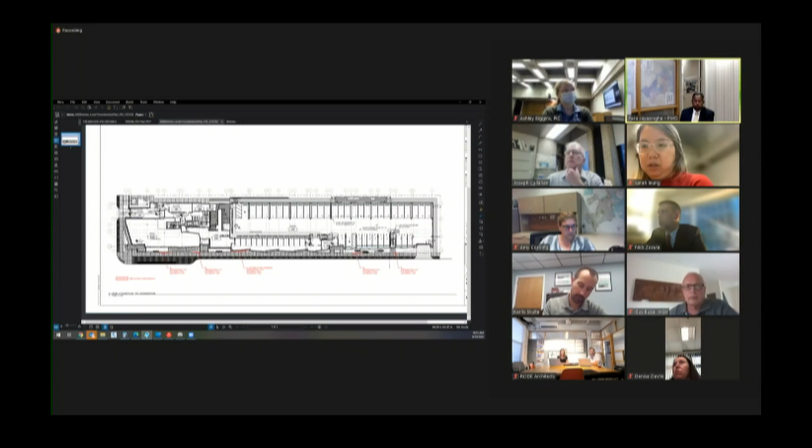Okay, this is Eric with RODE Architects. Just as a point of clarification, they're not canopies, so they will not be draining and creating icicle situations. It's actually part of the building massing, as you can sort of see in this view. But we will make sure we address the issue through our building design in detail.

Thank you. That's all the commission needs, just recognition that the respective city departments have looked at it and understand the implications. Because when they were doing the building design overview, it's possible they may not have clued into the fact that you're granting us a pedestrian easement, which creates a bit of an awkward moment. Okay, understand, thank you for the comment. Good thing on one side, a bit of clarification on the other.

All right, any further comments? Not trying to labor the point here. Any comments by PIC staff and all members of today's audience? No, none. Hearing none, we will see you in 2 weeks. That should put this to September 2nd. Will that work with you folks? Yes, thank you. Excellent, thank you, see you there, thank you very much.

Last item on today's agenda under the new business segment. Item number 3, Huntington Avenue, Massachusetts Avenue, Boston proper, grant of location on a petition by Cellco Partnership doing business as Verizon Wireless. Good morning. Thank you, Mr. Chairman. This is Michael Gimo, attorney at Robinson & Cole, representing Verizon Wireless.

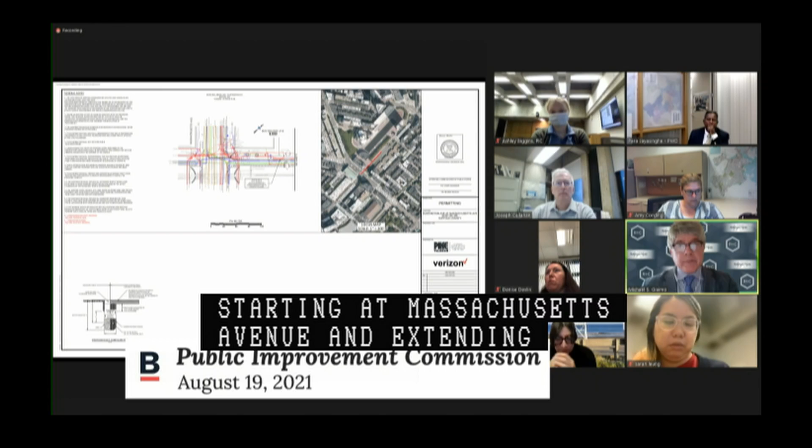I will share my screen if that's okay, if I can figure out how to do it. There we go. This is a request for a conduit installation starting at Massachusetts Avenue and extending east onto Huntington Avenue to a street light on the north side of Huntington Avenue. This would be a replacement street light for a wireless node.

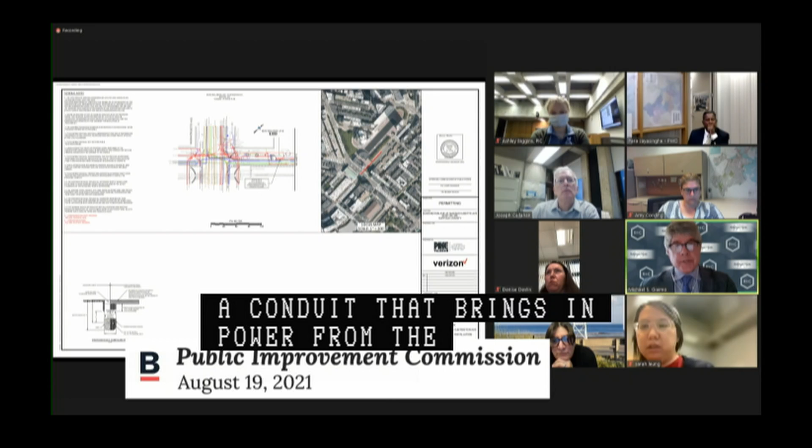The plan shows a 2.5 inch conduit plus a 1.5 inch shadow conduit, a new handhole, and a conduit that brings in power from this side, and a conduit that's a lateral to the light pole on the north side of Huntington Avenue. This is a similar installation to others you've seen, where there will be a replacement street light designed according to the city's protocols, providing wireless service as well as lighting. We did receive some comments from the Disabilities Commission, which we have agreed to, as well as street lighting comments, which we've also agreed to. That's it, it's a pretty simple installation, I think.

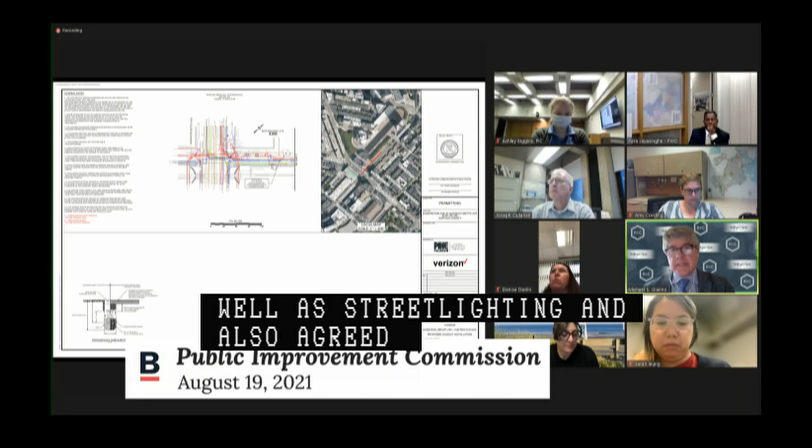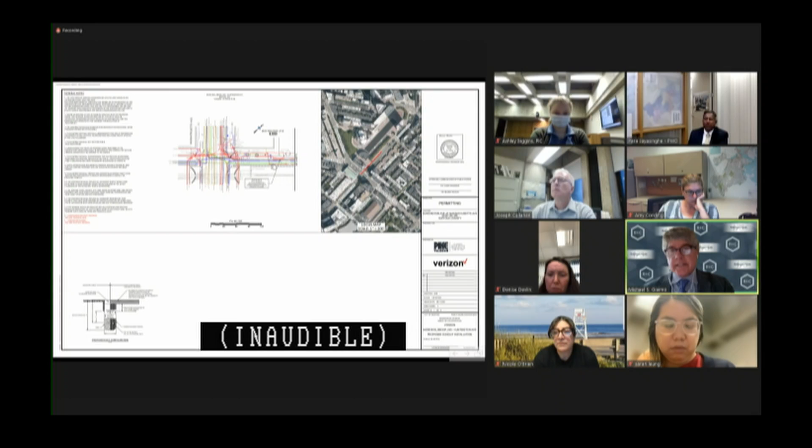Thank you, Michael. I just want to make sure I'm capturing what you're saying in its totality. Basically, this is singularly to support the access of a wireless system, when you switch our street lights to antenna poles, to get that wireless signal into your conduit system. Did I capture that? Yes, it's to run fiber to the pole and then a power connection.

So Michael, we recognize the absolute service which is provided to all those in Boston from that service. But I want you to give some consideration from my viewpoint as to the condition of the roadway of Mass Ave right in front of Symphony Hall. We, the city, have invested millions of dollars trying to make that roadway look nice, and all of these antenna connections are causing us to cut up the roadway.

So here's my appeal to you, Michael. If you or someone from your team can go take a look at the condition of the roadway at the intersection of Mass Ave and Huntington Avenue and try to visualize what that trench cut is going to do and how it is going to look.

Now, we the city have standards as to how we are supposed to put things back, but I'm getting a little anxious about the amount of cuts there are to streets that may be looking really, really nice. So that's a concern we have.

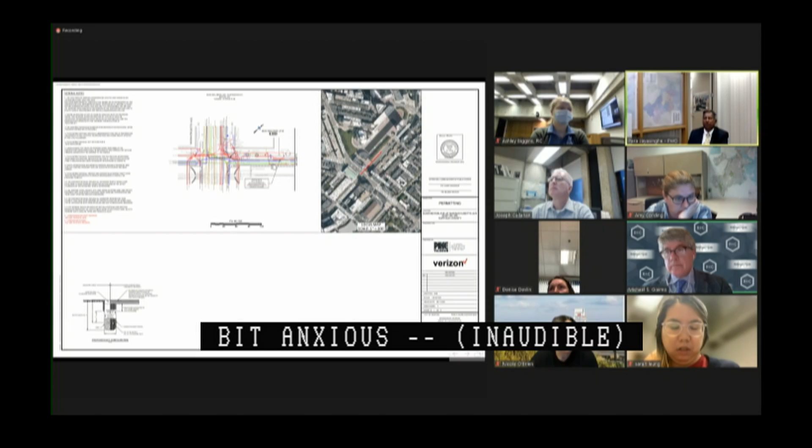We are not in opposition of your project, but it has to do with the amount of restoration that you need to do so that these continuing scars of our roadways don't look as prominent, out of respect for the city. Here, the northwest corner, we've got Symphony Hall. Am I making any sense to you, Michael?

Yes, thank you, I understand. I don't know if Nicole O'Brien from Verizon is on the call, or if she wants to address that, or we can come back to you and address it at the hearing. I know one of the purposes of getting in front of you today was because we understand there's a paving project that we wanted to get ahead of, exactly for the reasons you were talking about.

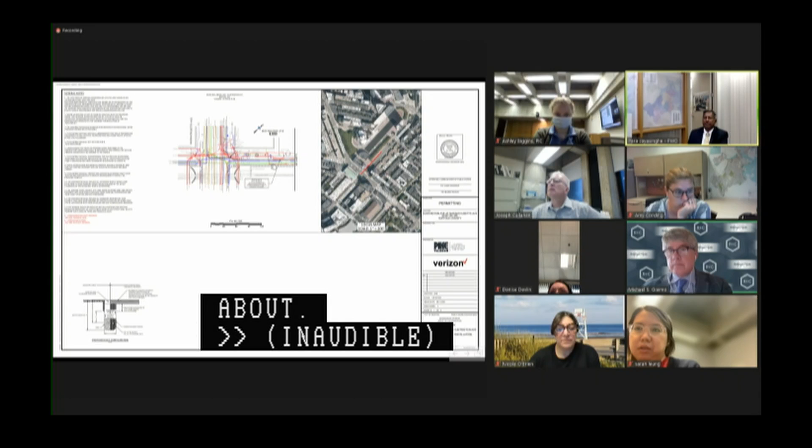Michael, if that is the answer, then I have wasted your time, okay? As long as someone cleans it up, whether it is us or you. But if you drive around our city, you can see the amount of cuts that are there, and I scratch my head to understand where is the lack of coordination, where we are not recognizing the basic functionality of the roadways. I mean, it is to serve the traffic, but it shouldn't look like a city which we are not proud of. This is Boston.

Understood, and we'll come back to you with a clear answer at the hearing. Thank you. Because if for some reason you are not coming up to clean this place up as a follow-through action, then you need to tell us how your activity, well supported by us, is going to impact the gazillions of people who are either driving through Huntington Avenue or Mass Ave, or those going to Symphony Hall.

Understood. Pretend that you are wearing your tux, however one goes to Symphony Hall, and see how you would like the surrounding to look like. That's all, don't want to labor the point. But it seems like you have it under control, just do let PIC staff know beforehand, because I don't think I'm going to have a laborious conversation during the public hearing if we find there is no appropriate trench restoration. Okay, thank you.